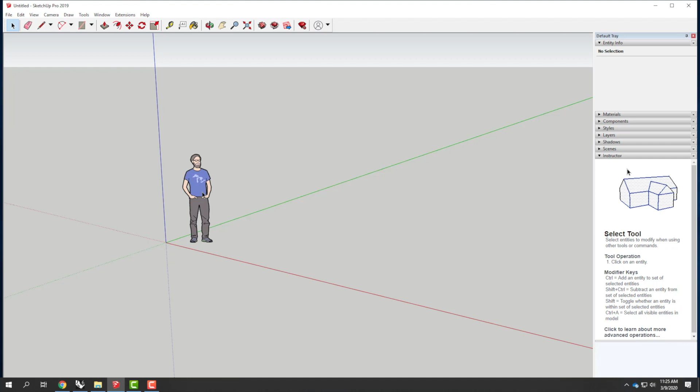So that's assignment 202 in a nutshell. Today in exercise 212, we're going to start with this whole process. Each time I go through this, I'm going to repeat from start to beginning, so I'll start all the way back at SketchUp, which is what you did last class as well. So there's a little bit of repetition. I'd encourage all of you to actually start fresh today though. Going forward, between today and Wednesday, you don't need to start fresh again—you'll just pick up where you left off at the end of class today. So I'm going to start fresh in SketchUp.

Again, I'd encourage you not to pick terrain that's too steep. Don't go pick Half Dome or something in Yosemite because it's too steep—you're not going to be able to cut this. We want a reasonable undulation, not a sharp cliff. If you do something with too sharp a cliff, it ends up being too many little pieces and too easy to burn up in the laser cutter. Something a little more moderate is generally pretty good.

So in SketchUp, I already have SketchUp Pro 2019 open. I'm going to go to the File menu, and I'll choose Geolocation and then Add Location.

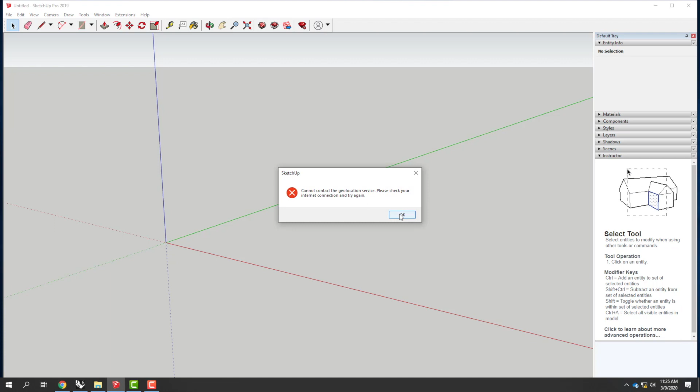Hopefully this doesn't happen for everybody—this has been my day-to-day. Yep, so the network's down. Great, so convenient. So I can't do that and get the geolocation. The good news is I can use my geolocation from last time, but unfortunately I can't show you that in SketchUp. Luckily, I also have Rhino already open, so I'll be able to start on this. Not everybody probably has Rhino open, so you'll have to wait for the network to come back.

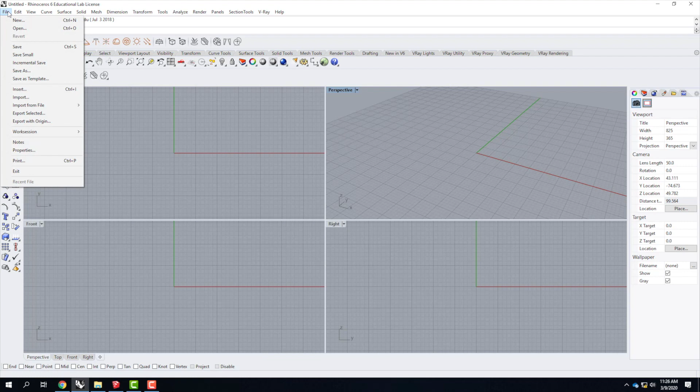Sorry about that. So first thing I'll do is bring in that terrain from SketchUp. I'm going to go to File and then Import. I'm not doing Insert—Insert would be a block reference. Import is just bringing the actual raw terrain data straight in. Let me go to my flash drive. And this was my terrain from last class. Oops, wrong one. Yeah, that was the wrong one.

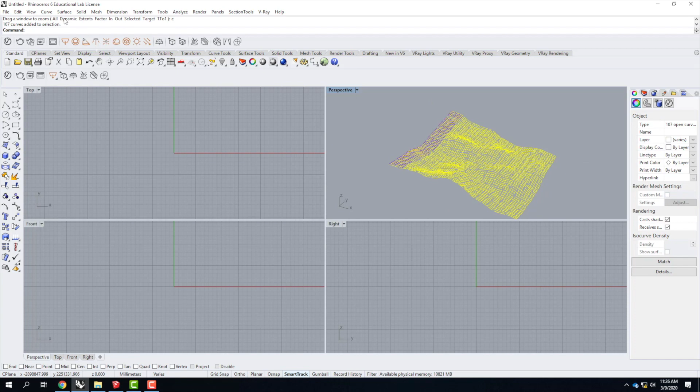All right, let me try that one more time. File, Import. I accidentally picked the Rhino 3D model, so instead I want the SketchUp model. There we go.

The SketchUp import options, the defaults here are just fine. We're going to go ahead and say OK. And that brings in my SketchUp model.

There it is. So when I start working with my SketchUp model here, the first thing I want to do is look at my layers and adjust them. So I have the terrain itself. I'm going to switch into shaded mode so we can see this better. And I'll move that onto layer 5 and call that SketchUp.

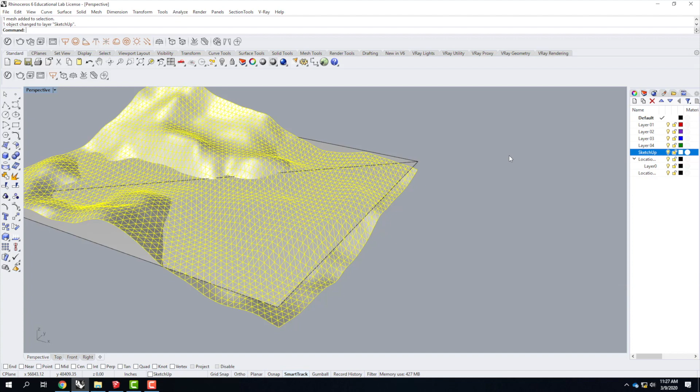Let me take that, right click, and put it on the SketchUp layer. This SketchUp plane, I probably should create a sublayer for that. Change object layer. And then I can go ahead and delete the original SketchUp layers like that. So I'm left with my piece of SketchUp terrain.

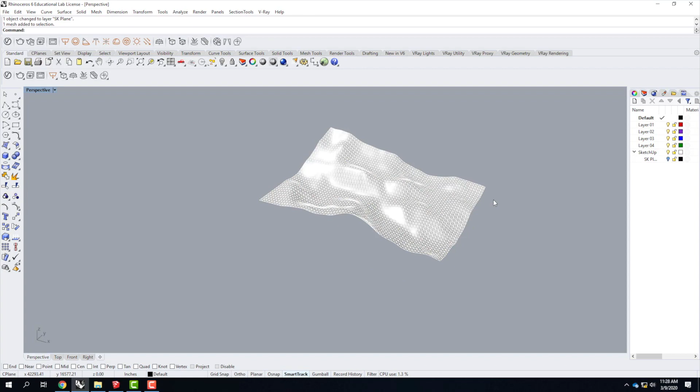And now I need to convert this over into that NURBS surface. So I'm going to do a contour X and a contour Y, just like we did last class. I'm going to change layer 1 to be contour X. I'll change layer 2 to be contour Y. And then I'll make layer X, contour X, active.

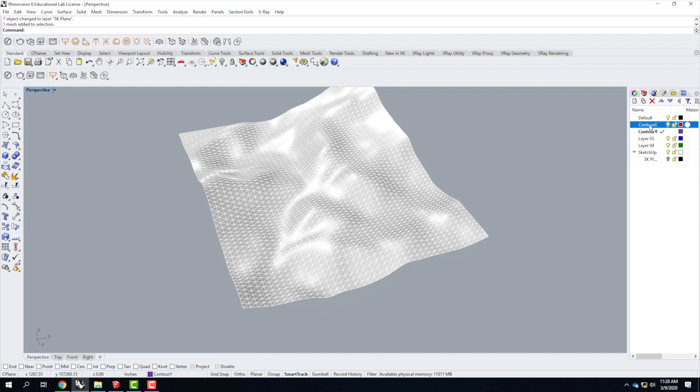And we're going to slice this mesh up using the contour command. So it's curve, curve from objects, contour. Alternatively, I could type contour into the command line. I need to turn on my vertex snap here so that I can actually snap to that corner.

And I'm going to go ahead and go out in this direction, but I want to turn ortho on so I'm going directly in line with my axes, not up or down. And then my distance between the contours will be 100 feet. And it will then slice up that piece of terrain.

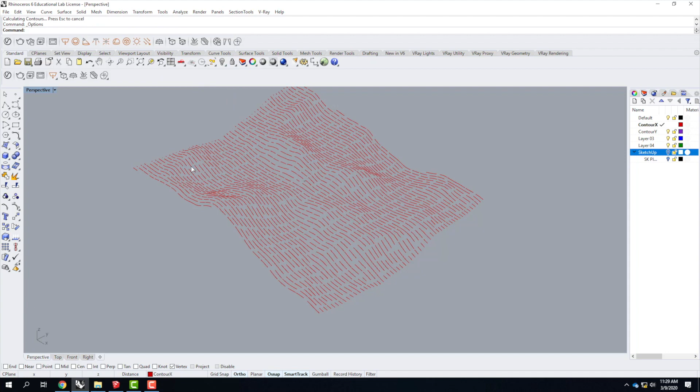If I were to turn off the SketchUp terrain, we'd see all of those slices. The gaps in here are due to that OpenGL error, so let me turn that off. We go to Tools and then Options, View, OpenGL, and uncheck the tessellation. There we go. Now we can see it as a straight set of lines.

I can confirm that I did it correctly by looking down on it in the top view, and all of those lines should be perfectly horizontal, which they are. Let me jump back into the perspective view here, turn back on my SketchUp terrain, and with nothing selected, I'm going to go back to my curve, curve from objects, contour.

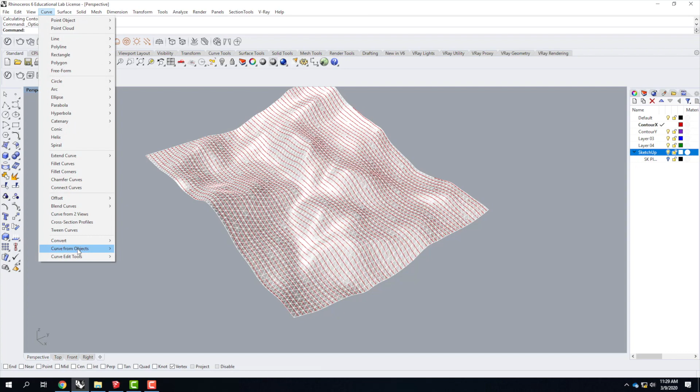Select objects to contour. It's going to be that mesh again. There it is. I'll press enter. I'll snap again to this corner. Oh, you know what? I didn't change my layer.

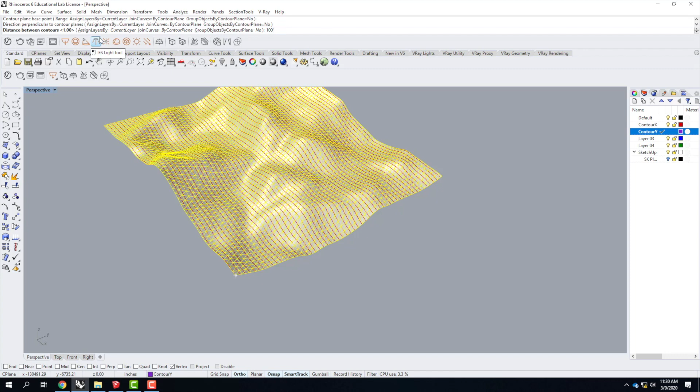There we go. Now I'm on contour Y, and let me go off in the Y direction here. Actually, it's in the negative X, but that's okay. And my distance between is going to be 100 feet. And now that is sliced up as well.

Let me turn off my SketchUp. And we can see what's left is just a network of curves that I've created. So in order to use the curve network command, like we did last class, I need to clean up the edges so I don't have any ragged edges along the outside.

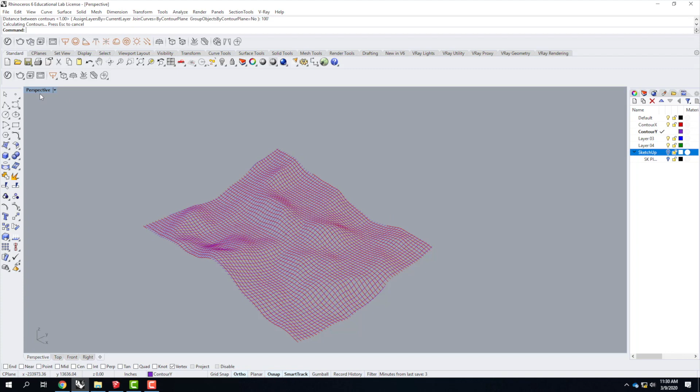So I'll go ahead and go into the top view, and I'll use this curve. I'm going to hold down Shift. I'll use that curve, and that curve as my trims.

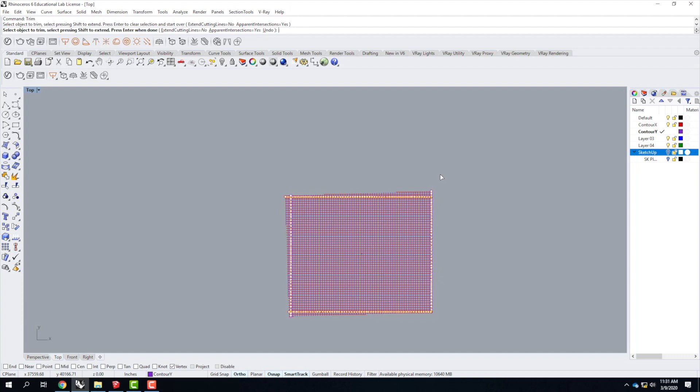Then we'll go ahead and type in trim, and we'll trim off all those pieces, trim off all that. Oops. There we go.

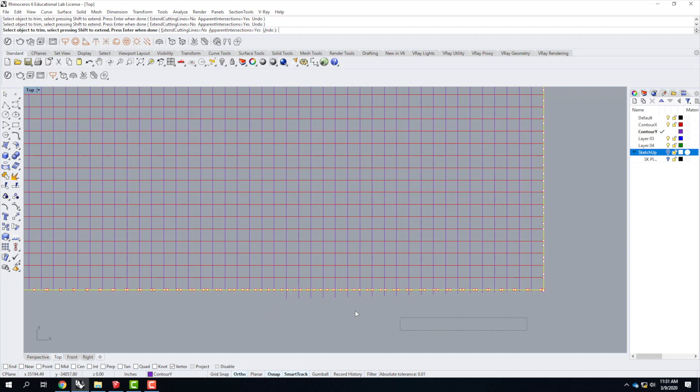Trim this section here, and then trim the bottom. I do want to make sure that I get in nice and tight here and get all of those last little bits. Perfect. I'll go ahead and press enter to end my trim.

And now I have a network of curves that is completely contained. There's no ragged edges to it. And this I can then convert over into a curve network, an actual surface.

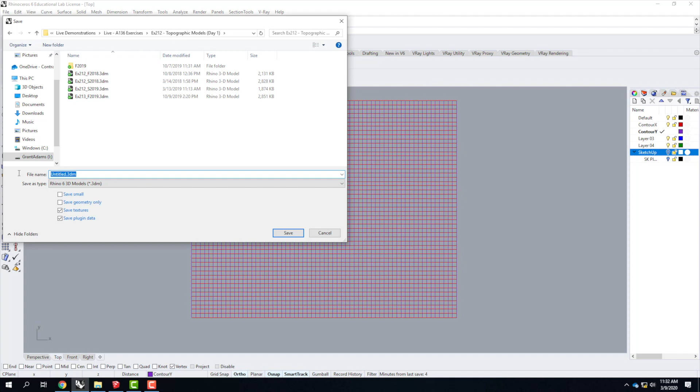Before I do that, I always like to save because it's possible that this crashes. I'll go to File and then Save. Let's put it into today's folder. Go ahead and click on Save.

Excellent. Now it's time to convert this over into that curved network. So I'm going to select, maybe not. I'm going to go ahead and select all of those curves. I'm going to go up to

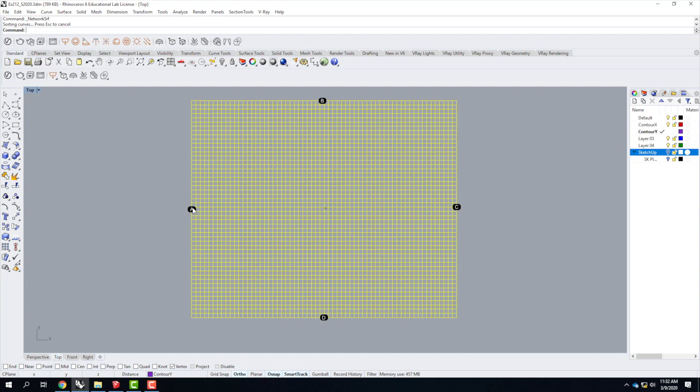surface, curve network. Alternatively, I could type in network SRF as the command line. Yes, I want to continue with these 115 curves. And if I did it correctly, I should receive an A, B, C, and D on the 4 sides of this particular piece, which is good. I have to wait for the little dialog box to pop up here, so we'll hurry up and wait.

There we go. I'll go ahead and just say OK, and it will then go through and build this curve network for me. So I'll go ahead and pause the recording. We'll let it finish, it could take a couple minutes. Hopefully the network has come back for those of you still waiting, and we'll go from there.

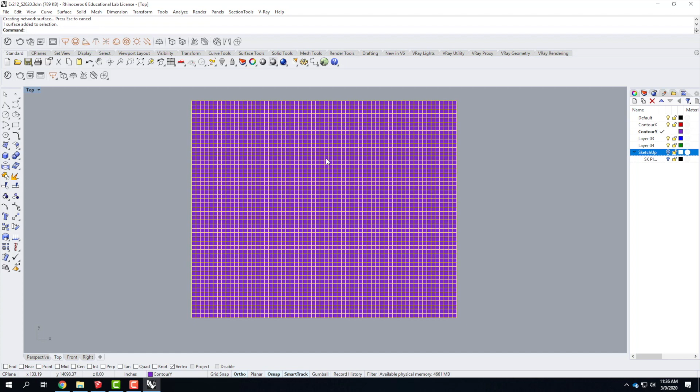All right, so I appear to have gotten there. When I get the curve network to finish, I'm going to do a single click on this surface and wait for a second so it can select the surface. There you go, it turns solid yellow when I go to select it.

And then I'll go ahead and type the rebuild command. It's also available under Edit and then Rebuild. And I'm going to rebuild this surface at a minimum of 200 by 200. There we go, so my U and V spans are 200 by 200.

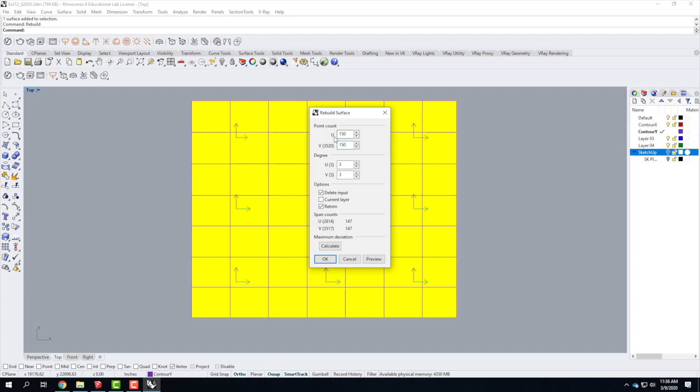If you want to smooth it out a little bit more, we explored that option last class with the different levels. So 150 might be about the right level of smoothness for me, knowing what I did last class. So I'll do it at 150 by 150. I'll say OK, and that makes it much more workable.

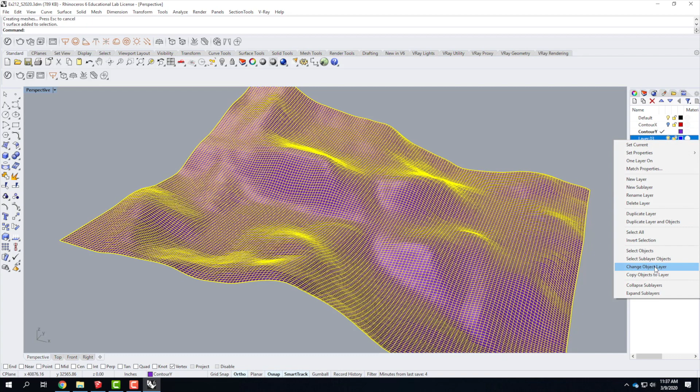So I can enlarge the view here so that I can see it. I don't need the curves, the X and Y curves anymore, so I'll turn off the contour X. Let me take the surface and put it on its own layer, and I'll also make that surface black so you can see it. And then we'll turn off the contour Y as well. So this is the resulting surface that I'm going to work with.

So this surface, I now need to figure out how to make it into one of these models. This is where we differ a little bit from last class. We got to this point last class, but now we're going to spend a little bit more time really fine-tuning what we do at this stage.

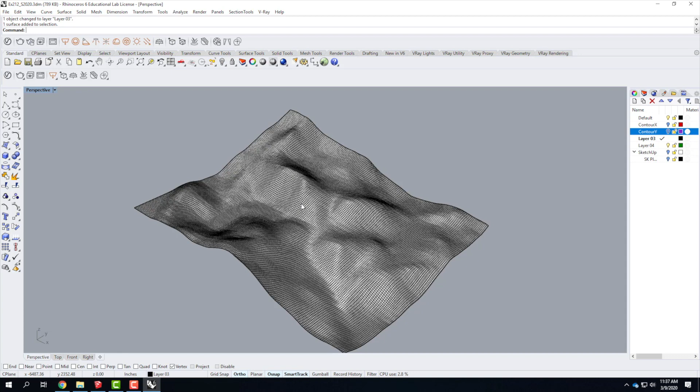So the model that I'm asking you to build is 11 by 17, which is what this is. Fits nicely on the laser cutter. The laser cutter bed's 12 by 24, so 11 by 17 fits nicely within it. We're going to build this size. So the first thing we need to know is what 11 inches by 17 inches is at the scale that we intend to build the model at.

There's a lot of math involved in figuring that out, which of course you could do, but I gave you on the bottom of the handout today this little cheat sheet that helps you sort things out. So we're looking right here under paper size, 11 by 17, and we're also looking here under select scale, drawing inches versus actual feet.

So for example, if we were doing 1 to 200 scale, or 1 to 250 scale, or 1 to 500 scale, at those various scales, our 11 by 17 model would be - let's do 1 to 250 here for example - 2,750 feet by 4,250 feet. Does that make sense? So I'm multiplying the scale out to figure out how big this is in full size.

So you're going to pick whatever scale seems good to you, and you can kind of see how they run their way down here depending on what your paper size is and or what your scale would be. This is always going to either be given to you - hey, I want a model at 16th scale or whatever, depending on your lot size - or it's something where you're going to have to determine it. We're kind of reverse engineering it because I want a model that's 11 by 17, and I really don't care what the scale ends up being. It can be any scale, for our purposes.

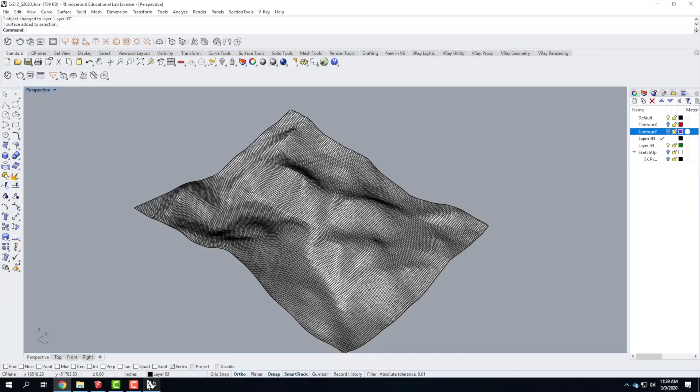So I'm going to go ahead and pick, well, let's do the 1 to 250 for right now. And so at 1 to 250, I'll come over here and I'll pay attention to the 11 by 17. This was 4,250 by 2,750. So given that information, I'll come back to my Rhino.

I like to do this in the top view because it seems to make a little bit more sense. I'm going to create a basic rectangle corner to corner. I'll click, and then I'm going to type in the @ sign followed by 4,250 feet, and then comma 2,750 feet. I believe that was correct. We'll double check.

4,250 by 2,750. Notice that in Rhino, I made sure I put the foot marks so I'm in the feet unit. I'll press enter, and that gives me this rectangle, which is representative of 11 by 17 inches at 1 to 250 scale.

If I didn't like that scale, I could pick a different one. Let me check my cheat sheet here. I could do 128th inch to 1 foot, which would be 1,408 by 2,176. Same thing, I come back in here and enter 1,408 feet by 2,176 feet, press enter, and that gives me that size, or that scale.

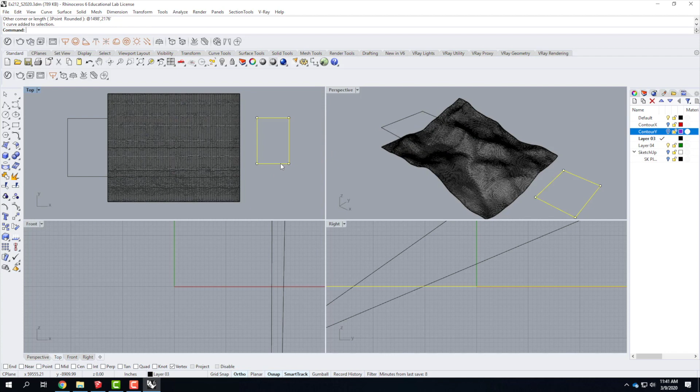At this point, it's just a matter of lining these up over the top of my terrain to get the piece that looks interesting to you. Maybe something like that. If it's the smaller one, I might move it to a different location, maybe more over here. Again, it doesn't matter the scale—I'm just trying to show you how this would work. Does that make sense so far?

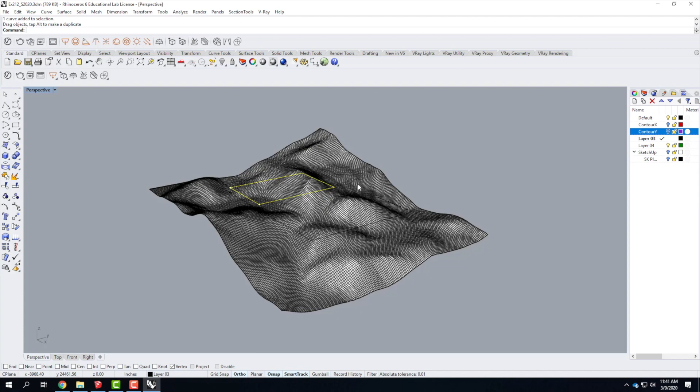So I'm reverse engineering this size of the rectangle. I'm going to use the big rectangle versus the small one. Once I have the size and it's positioned approximately where I want, you may find that doing the positioning in the top view with it turned to shaded can be helpful—you can see where the hills are. Again, it's up to you.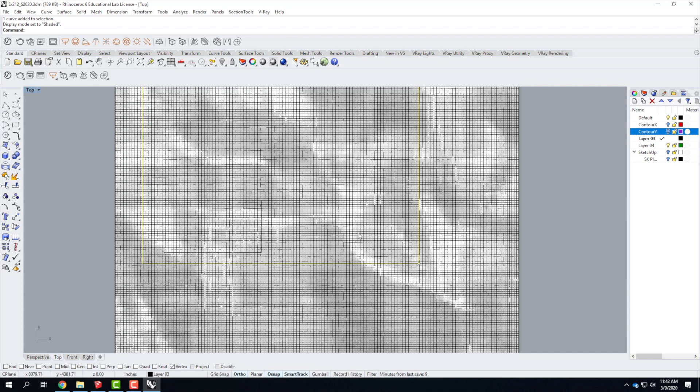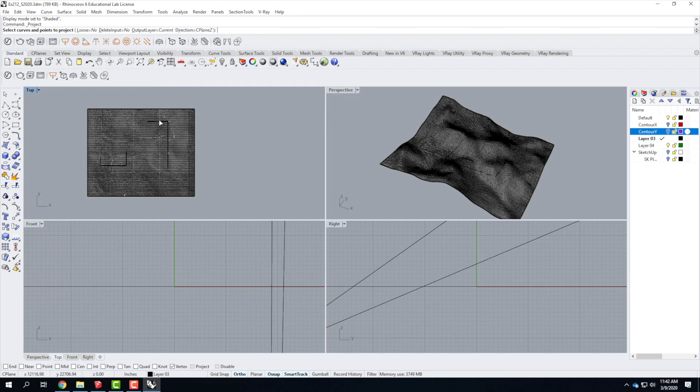I'm going to do a project command in the top view to take this flat rectangle and project it down onto the surface itself. Make sure I'm in the top view. I'll type project, or go to curve from objects, project. Select curves and points to project—there's my curve. Press enter, select surfaces—that's my surface, press enter. As soon as I do that, the rectangle gets pushed out onto the surface itself.

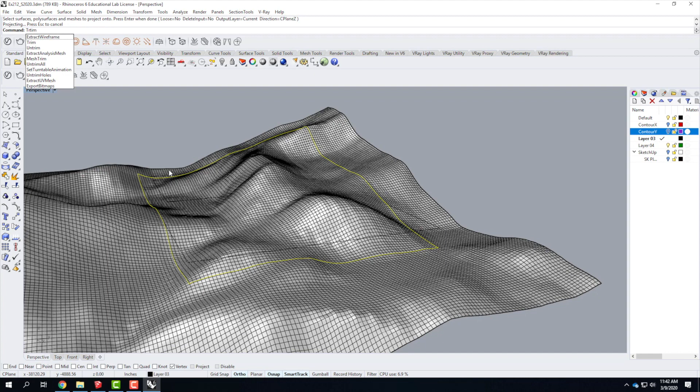That will allow me to use it as a trim. I'll type trim and trim off the extra surface around it. So now the remaining surface here is the part of this terrain that will end up being the model. I've cut it down to 11 by 17 in scaled-up form, and now I have that as my terrain—that will be my model.

From here, I need to figure out how to slice up this model. That slice isn't going to be an arbitrary value like last class—remember, I told you we did it at 10 feet last class. This time, the vertical slices will be based on the thickness of the material we're going to build our model out of. If I jump back to my cheat sheet, you see I have contour material thickness ranging from 1/16 all the way up to 1/2 inch.

You could do it out of, say, 1/2 inch plywood and have this work just as well. We're going to use the cardboard available at the bookstore—standard brown cardboard, this stuff—to make our contours. If you measure it very carefully, it's a little larger than 1/8 of an inch, which puts us over into the 5/32 range. By the time you add a little glue, we're almost spot on 5/32 of an inch for our contour interval.

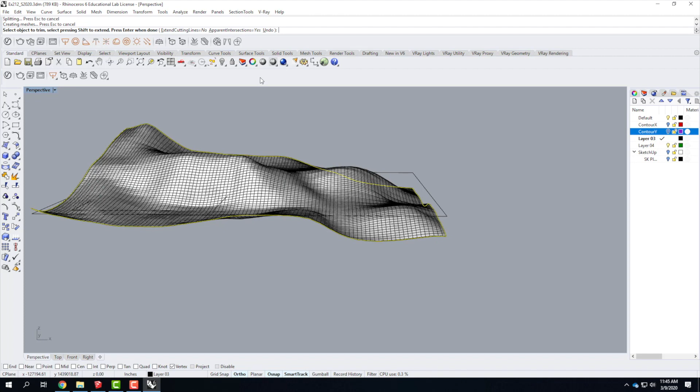Knowing that number, I'm going to come back into my Rhino file. I'm going to create a new layer, make it active—oh sorry, I have to finish my trim first. There we go. I'll call this layer... topography.

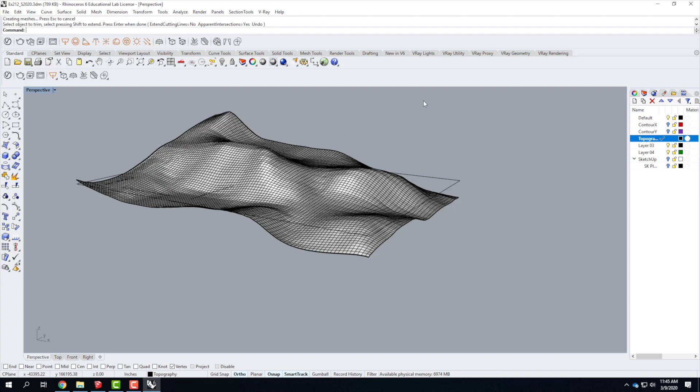Okay, so that's active. I'm going to create a contour from this surface, so I'll go up to Curve, Curve from Objects, Contour.

Select objects to contour - it's going to be that surface. I'll press Enter. Select the base point, it's going to be on the corner right there. I need to turn on my end snap to be able to snap to it. Oops, I didn't quite get it, let's try that one more time. There's the contour, there's my corner.

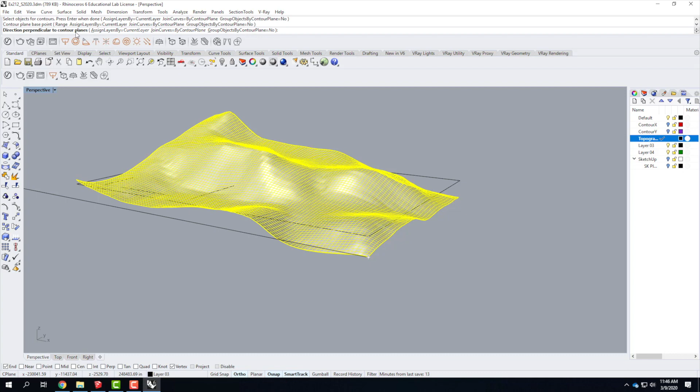Now I want the direction perpendicular to the contour planes to be going straight up and down. So I'll do that using one of the side views, either the front or the right side view. And we have it going straight up and down.

There it is. And now the distance between contours was that value right here, the 39.063 feet. Make sure you type in the foot mark here. So it's going to be a distance of 39.063 feet, and I'll go ahead and press Enter.

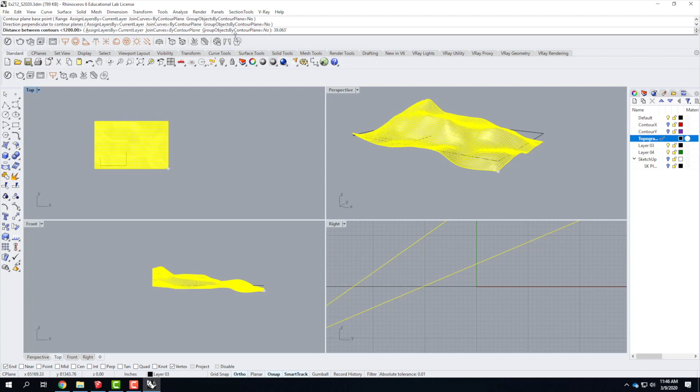It's now going to slice up that piece of topography into intervals that ultimately are the correct thickness for making this out of it. Does that make sense how I translated that all the way through? It's based on the physical model that you're going to make after the fact.

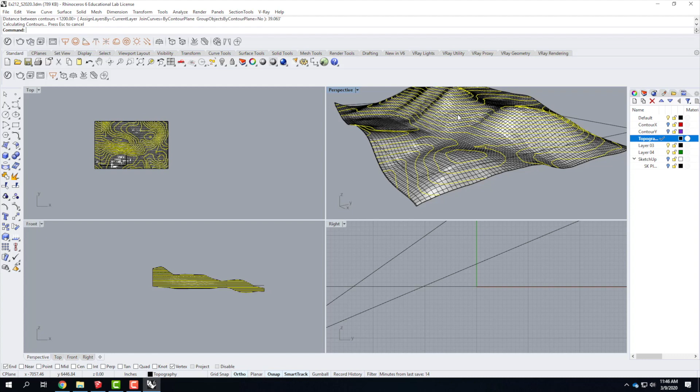Okay, so now I have this. I can actually turn off the surface itself, and I can work with just these contour lines, right like that.

So at this point, we need to start working on the step intervals that go up and down each side. And if you look at one of these pieces that have come around, you can kind of see where I'm going with this. If you look at the side here, you see those steps. That's essentially what we're going to draw on the computer screen right now.

So there's two different methods of doing this, some of which are easier. One appears easier initially, the other one is easier once you get it and have practiced with it. So I'm going to show you both strategies as you go through this, and you can choose which one you want to use. The first one that I'm going to do is I'm going to create a point on the end of every one of these curves going up the side.

I could do it on any one of these sides. I'll do it on this side because it's pretty consistent all the way here. So I'm going to come over to my tools. I'm going to click the little triangle next to this point because I don't want a single point, I want to be able to create multiple points. So it's the next one over.

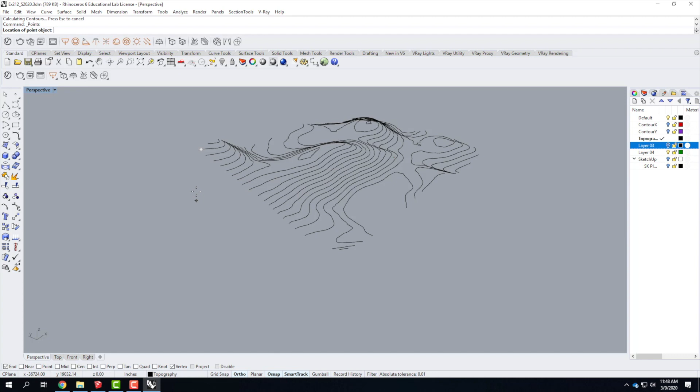I'll create multiple points. It's going to ask me the location of the point, and I will do that by just snapping to the end of each of these. So I'll click on the end of each of these little curves as I go down. There and there. So I have a point on every one of those ends.

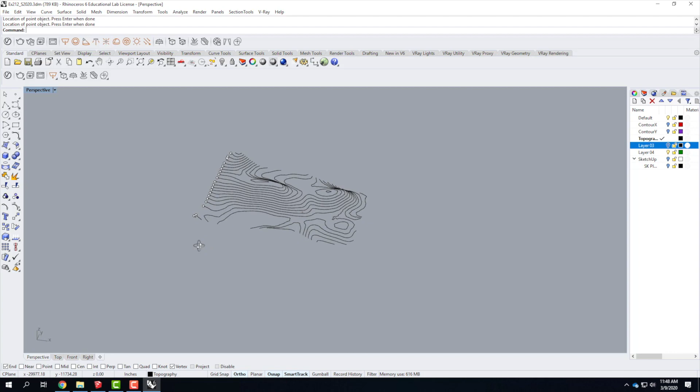And this one - oops, that one got off a little bit. There we go. So I'm going to go ahead with all those points, and I'm going to select them.

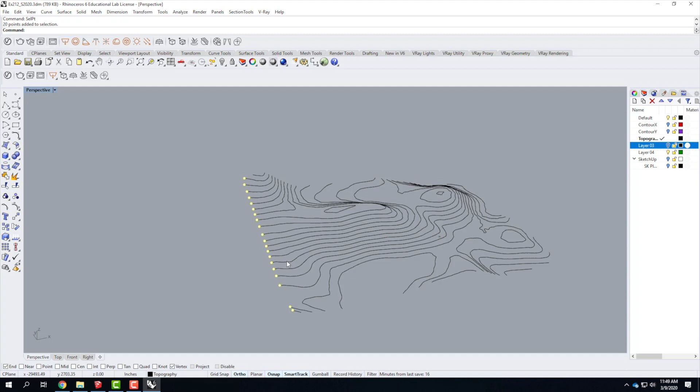Now I can use a key command to help me out here. If I type SELPT, it will select all the points, which makes my life a little easier. Otherwise, I would have to go in and select them all like this.

This one, something's off with this - it's probably because it's on the back, not on the side. So I'm going to deselect that one because it's not relevant for our steps. All right, there we go. So I have all those points selected.

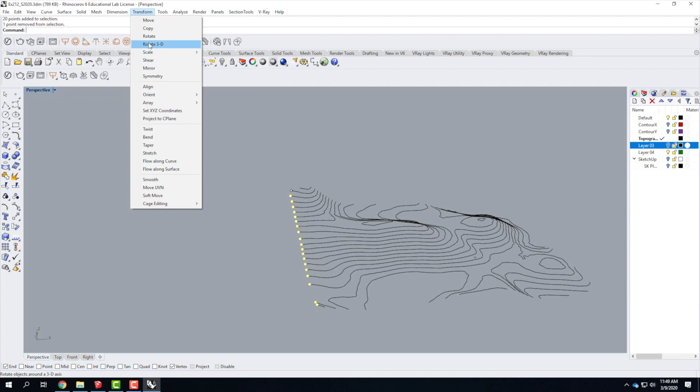I'm going to use a Rotate 3D, so I'll go to Transform and then Rotate 3D. And I'll pick wherever the low point is - these two points are at the lowest point, so I'll start from this point right here. I will go out along the axis, so not snapping to anything. I will go straight up, and I will fold all those points down and over to the side.

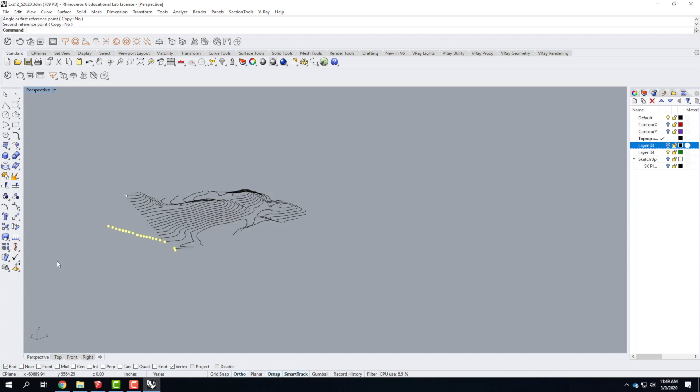So I folded those points down to the side, and now I can actually start to draw between them. So I'll start with my polyline tool. I'm going to turn on my point snap as well as my perpendicular.

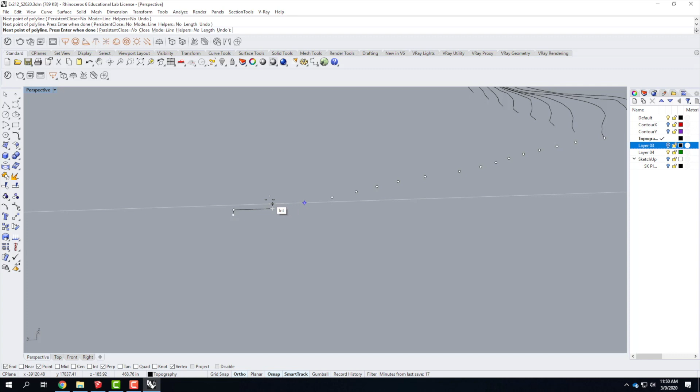I'll start at the first point, I'll go down and snap to perpendicular. I'll go to the next one, snap to perpendicular. I'll go to the next one, snap to perpendicular, and work my way past all of these.

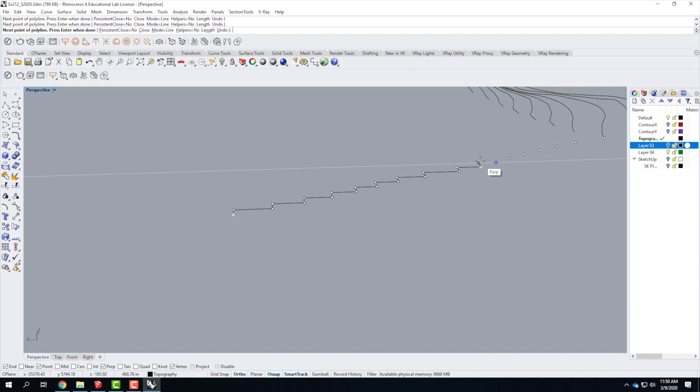Okay, so I got to this point. Now, this is at the very bottom of a valley, so I need to still go down here, but I don't know how far because I have nothing to snap to reference to, except that I do know how far because I know what the interval is supposed to be. It's 39.063 feet. I'll come over, and then I'll start going back up on this side.

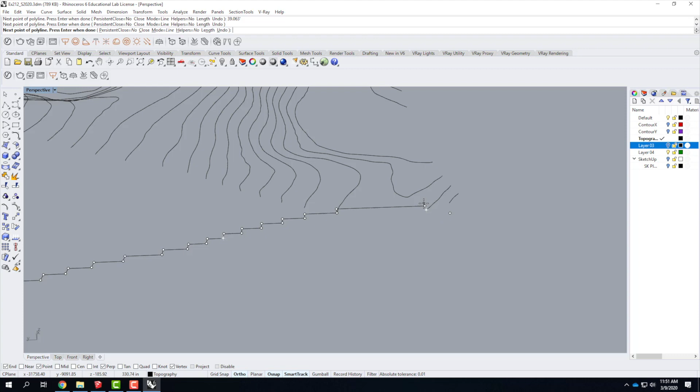There it is, and I'll finish right there. So what I was able to create is this stair-step pattern. If we look at it from the side here, yep, looks like a nice stair-step pattern.

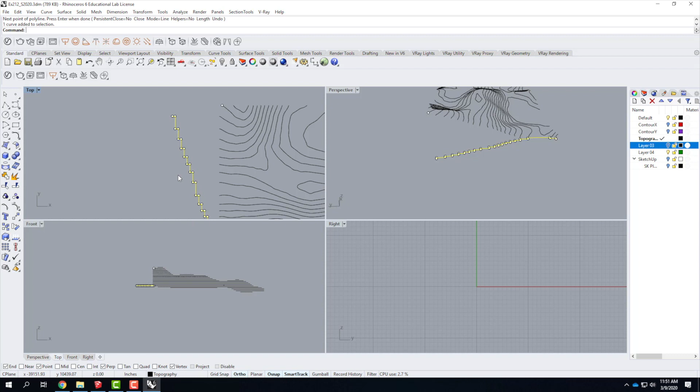Everything is at right angles to each other. Nothing's off or skewed, so that's good. At this point, I can take all of that right here, and I can use a rotate 3D and reverse the rotation so that we go from being flat back up into the vertical position. If I did it correctly, we'll see all the steps nice and even going down and then back up.

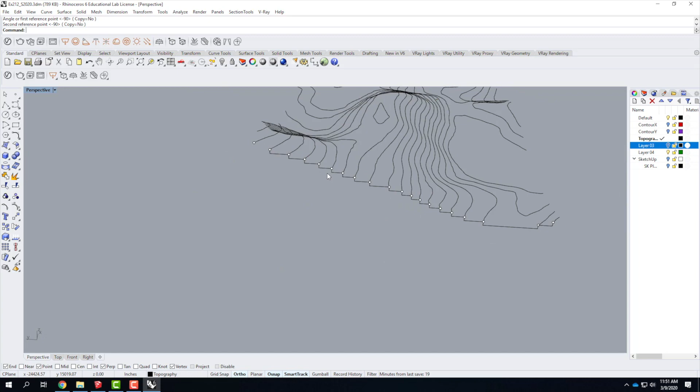So that's one method for doing it. And I think initially that method will seem easier because it's pretty intuitive. You just take your points, you rotate them flat, you draw your line, call it a day.

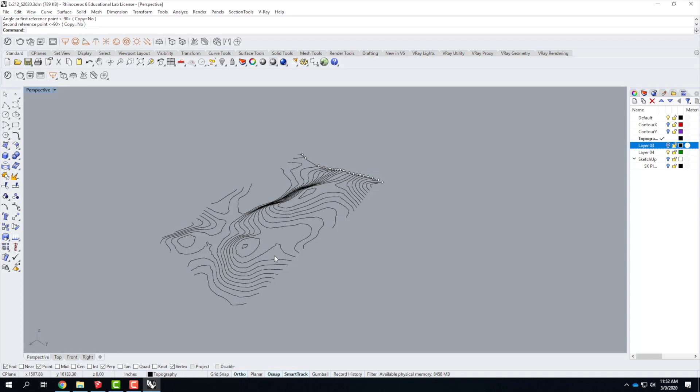Now the other thing that I'd like to introduce today is a more advanced concept, but it's a very powerful one once you kind of grasp it, but it's a little bit harder to get. And that is the idea that we can create a drawing plane, a plane in which we draw. By default, this plane is flat on the ground, but we can move that plane to be vertical, and we can move it wherever it is. It's called the C-plane.

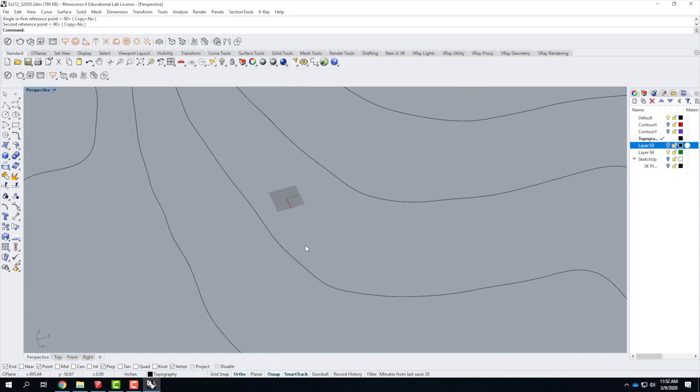And I'm going to move it. So that you can see it a little bit better, I'm actually going to make this grid bigger, representative of the C-plane. I'm going to right-click on the grid snap icons, and I'll go to Settings, and change my minor grid line spacing to be every 12 inches instead of every 1 inch. When I do that and say OK, my grid's going to get a little bit bigger.

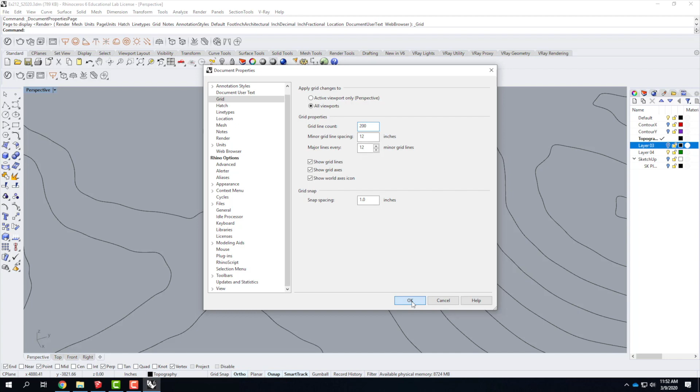I could make it even bigger than that. For illustration purposes, I could say let's make it 200. And now you can kind of see that in a much bigger context. Okay, so this is representative of the drawing plane. So if I just started to draw something, it would always be flat on that plane.

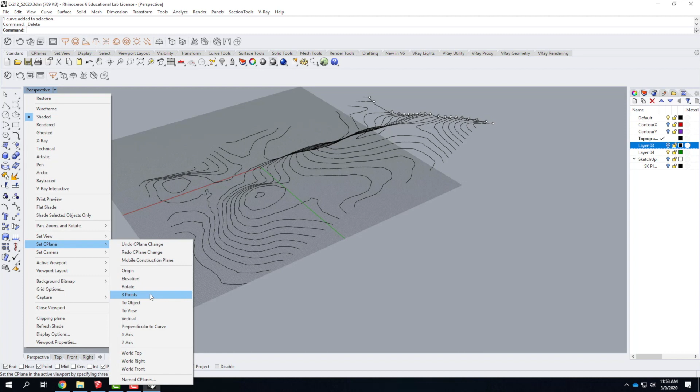Now I can move that plane, which is what I'm going to do right now. I'm going to go to this little downward facing triangle, and I'll go to Set C-plane, and I'm going to choose 3 points. So you see that I now have that green and red axes.

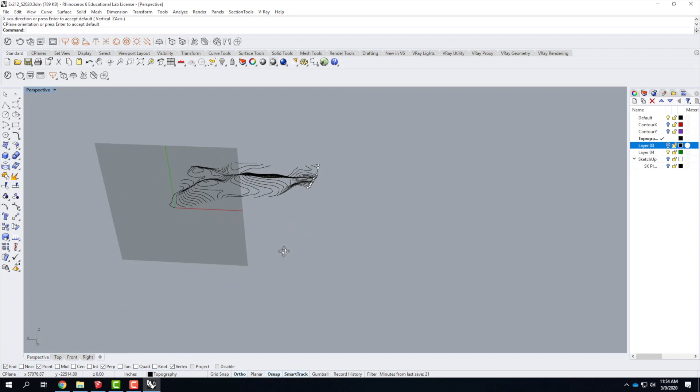I'm going to snap to the first point here down at the bottom, and then I'll place one of the axes going right along here. And my second axis, I'm going to want it to go straight up and down. So I'll move into the side view and make sure I'm choosing straight up and down, like that. And we can now see that that grid, the drawing plane, moves to be in line with that side of my terrain. That means that if I were to just start drawing, everything that I'm going to draw is always going to be in that plane.

So I've shifted what plane I'm drawing in. That also means that it's much easier now to start drawing from here and doing my snaps. So I can draw directly on the side without doing the rotate 3D and draw every one of my little steps.

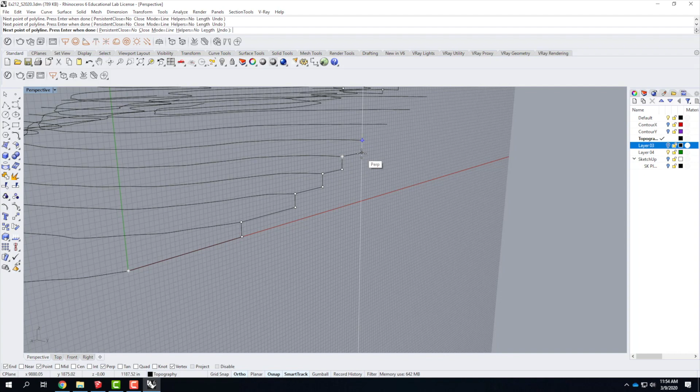Now the other part about this C-plane is that in order to get it back, or to change C-planes to, say, the other side, you're going to want to reset it. So I'll go back to the downward facing triangle, go to set C-plane, and choose world top. It goes back to the default.

So it's back to the default, and then go to another C-plane. Don't try to move from one C-plane to another. Go back to world top and then move from there. It'll just make your life a little bit easier. So once again, it would be that downward facing triangle, set C-plane, 3 points. I'll start at that point this time. We'll go along this axis, and then we'll go straight up and down like that, and that then shifts that C-plane to be vertical.

Question? So under that edit C-plane thing, there was also world right and world front or something? Correct, correct. Those are the C-planes that are used in the front and right side view.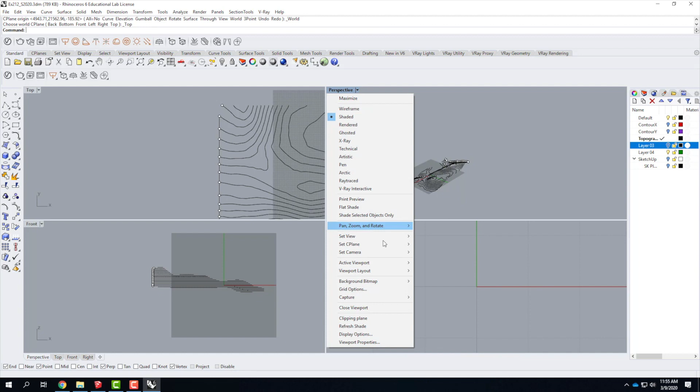If I were to use that C-plane here, let me show you. Let me go to Set C-plane. We're going to go back to my world top. And then if I go to Set C-plane and use world right, for example, it will set it up in a vertical manner, but it lines up at 0,0, not at where my point is. So when I move it to my point, then I'm drawing in that plane, which makes it a lot easier.

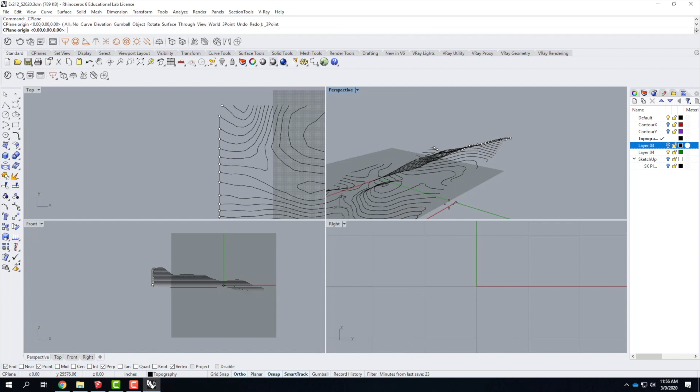So I'm going to go back to Set C-plane, go to world top, and then back to Set C-plane, and we'll go to my 3 points. I'll start there again. I'll go straight up and down, and then continue drawing with my steps from here. Same snap strategy, and we'll work our way up.

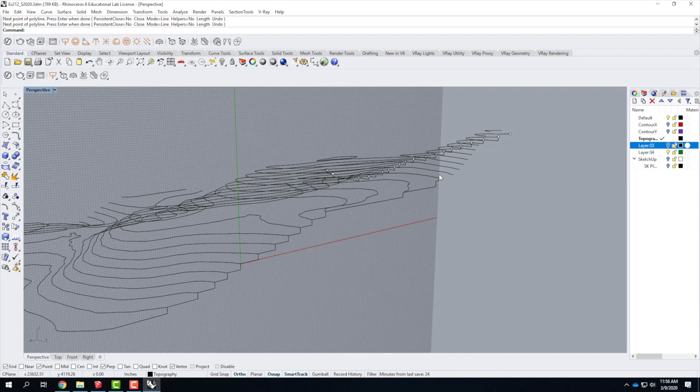Now when I get to the top of a hill, which I'm about to do... oh, maybe not. Do I not hit one here? No, I don't. I thought I was getting to the top of the hill. I'll do one. I'll end that there. I'll do this one across the front to help illustrate this, or this one would work. I'll do this side. So I'm going to go back to Set C-plane, world top.

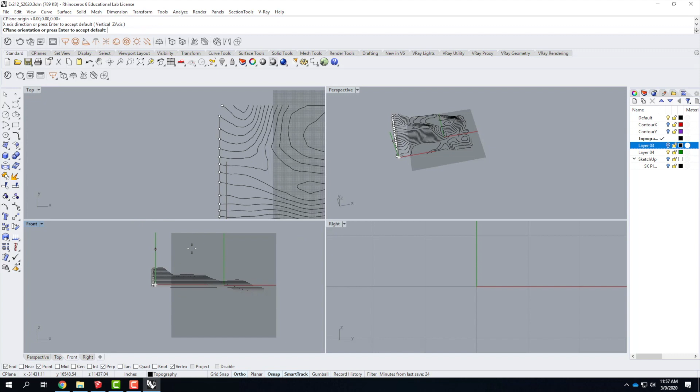We'll go back to Set C-plane, 3 points. We'll start right there. And then we'll go vertical right there. Now it's in the front. So I'll start from that point there, and I'll initially be going down. There, next one is there.

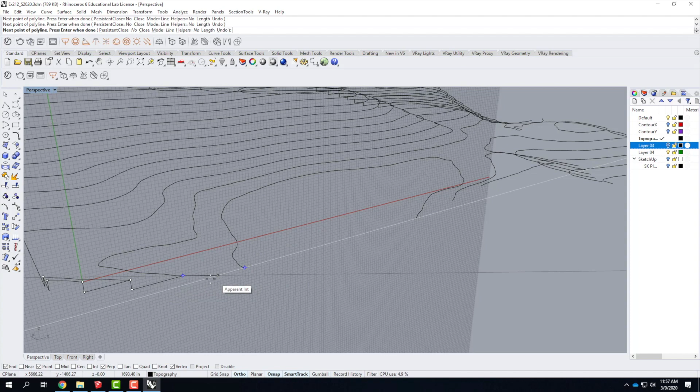Next one is there. Now on this level, same thing that happened over here - I get to the bottom of a valley. So I actually need to go down by 39.063 inches over, and then start going back up the hillside. The reason you can tell this is the case is because this contour line comes around and ends up connecting back to there. So it's one level.

And if you look at one of these models, this is, of course, not the one to look at - there's only a tiny little one. But some of them have it where you can really see where that same scenario would happen. So I'll work my way up.

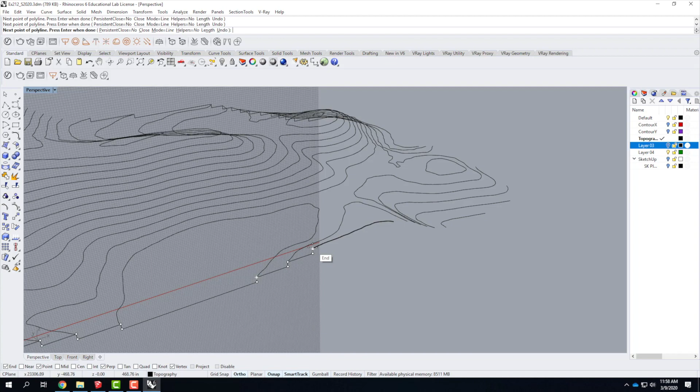Now when I get to this point, we're at the top of a hill, not at the bottom anymore. So instead of going up again, I just go straight across, and then we start our way back down. So at the bottom of the valley, you're going to measure and go the extra thickness of a contour. At the top, you're just going to go straight across. It should make sense from a step standpoint when you hit these various options.

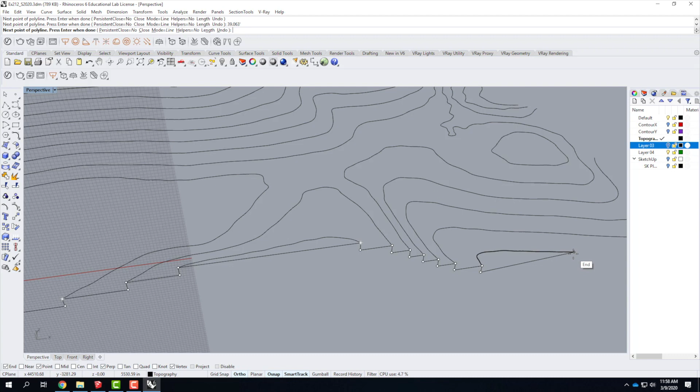All right, here I am at the bottom again, so we'll go straight down 39.063 inches. We'll go across to hit there, and we'll work our way back up to there. I don't want you today to worry about the corners. You notice that I just skipped the corner - we'll come back next class and deal with the corners.

So our goal would be to have all 4 of the side steps done today. You work your way all the way through from the SketchUp terrain to having all 4 of the sides with all the steps done. Next class, we'll deal with the corners, look it over and make sure they go up and down at the right places. And then we'll deal with making them into the model with the sides and that sort of thing. Okay, so I'm going to let you guys all start.

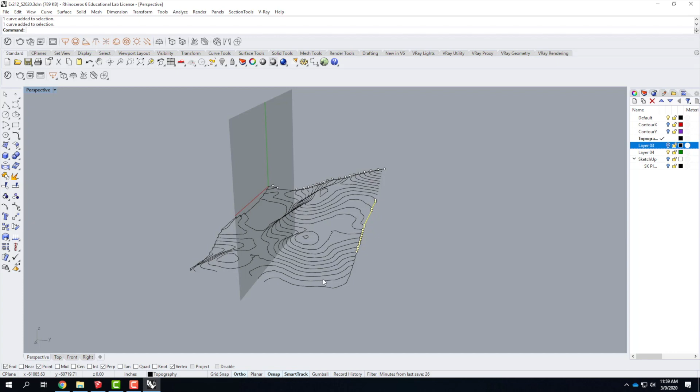I should point out that all of these are written out - there's tutorials for this stuff. If you go to the Rhino tutorial section, under physical modeling, Topography Method 1 will walk you through exactly what I was talking about. There is also a discussion of C-plane, so you could go to that link, which doesn't exist - I'll fix that link. It would be available here as well.

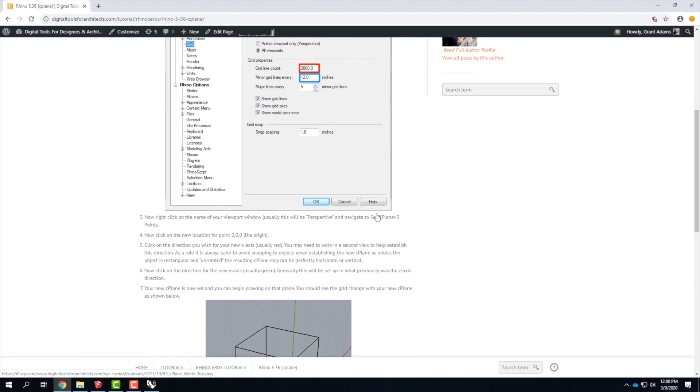Let's see here. Rhino 5.36 [cplane], would be C-planes. And this walks you through C-planes, etc. Okay, so all of that's there for you.

We're not dealing with the physical modeling, Topography Method 2. That's an entirely different strategy for how you create this. We're not going to be building that way, so don't worry about that. We're going to concentrate on just Topography Method 1.

Okay, so I'll let you guys start working. Let me know if you have any questions. And like I said, next class in 213, we'll start at the beginning and go all the way through again. So you'll see this at least one more time.